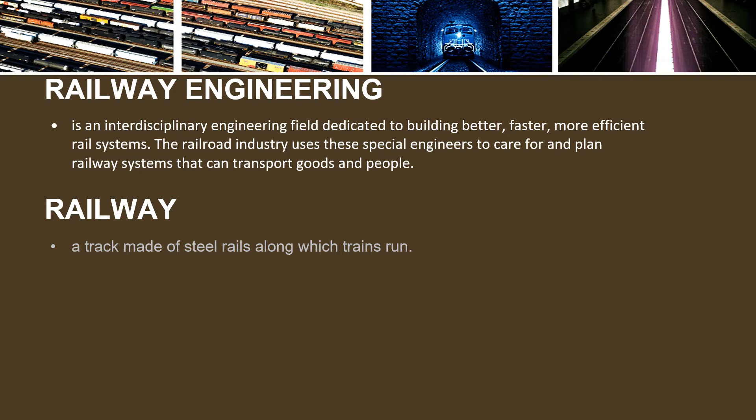Let's tackle the history. It was invented in Great Britain in the 18th century. Rail transport expanded considerably during the second half of the 19th century and the beginning of the 20th century, but there was a considerable decline in the second half of the 20th century due to the increase in car and lorry use. In the last 20 years, high-speed trains, saturated roads, and the development of urban rail transport have led to a new expansion of railways, though because of this many branch lines closed.

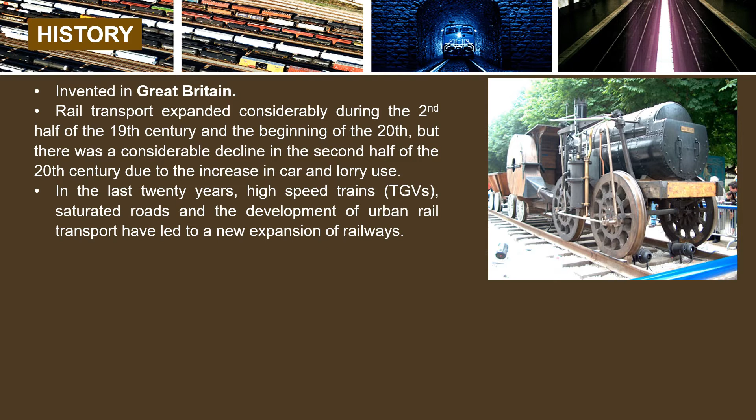This engine in the picture was designed by Marc Seguin. It was one that helped pull coal trains from the mines to waterways.

Before the 1800s, the road network was fairly complete, but travel was slow and uncomfortable. Wagons drawn by horses were still, along with water transport, the only means of travel. Denis Papin had discovered steam power in 1679, but there was a 100-year wait before the British combined steam traction and cast iron rails. It was also a British engineer, James Watt, who designed the first really useful steam engine in 1776. It took 100 years for steam traction and cast iron rails to be fully developed.

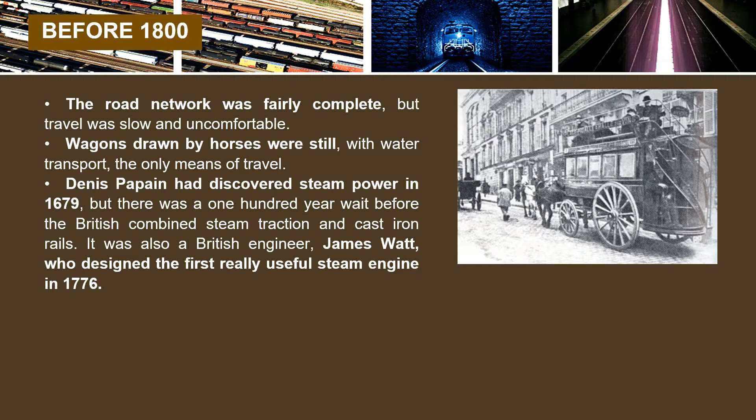From before 1800 to 1850 in England: in 1804, Richard Trevithick built and operated the first locomotive. In 1806, with the help of William Jessop, they developed the shape of the wheel, which marked the true start of railways. Between 1812 and 1823, locomotives were built successively by John Blenkinsop, Matthew Murray, William Hedley, Christopher Blackett, and George Stephenson.

As early as 1817, Stephenson built a locomotive that pulled a 30-ton train at 10 kilometers per hour. In 1823, George and Robert Stephenson founded the locomotive factory in Newcastle, where the first engines used in France were built.

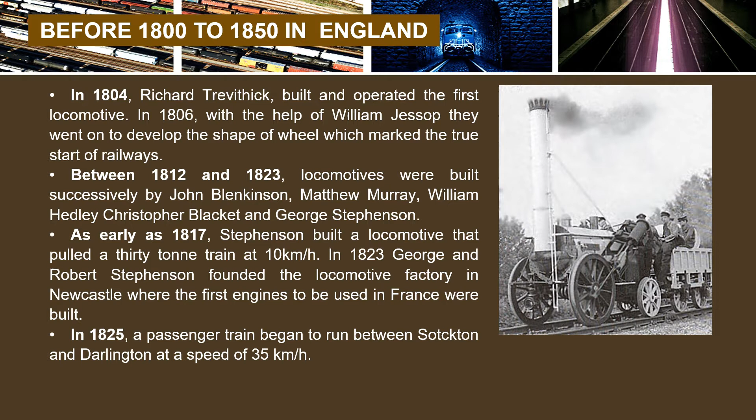In 1825, a passenger train began to run between Stockton and Darlington at a speed of 35 kilometers per hour. That year, the British introduced the first fixed signaling on railways and the first use of tickets. The one shown at the side is Stephenson's Rocket from 1829.

Before 1800 to 1850 in France: French engineer Marc Seguin, who invented the tubular boiler, persuaded the minister in 1826 to build the first modern railway line joining Lyon and Saint-Étienne over a distance of 56 kilometers. Seguin took charge of the works, commissioning and the different stages of operation. He used two locomotives purchased from Stephenson's factory, but found the English locomotives too heavy and too slow. In 1829, he modified his tubular boiler to produce 1,800 kilograms of steam power per hour instead of 300, increasing train speed from 10 to 40 kilometers per hour.

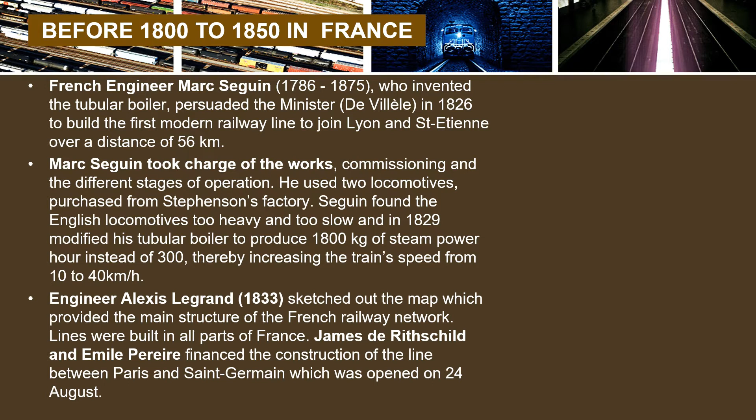Next, from 1850 to 1870, the golden age of rail. Works started on a large number of lines, and the six large companies that were to manage the national network on the basis of geographical zones were set up in 1859. At the same time, in urban areas, the development of public transport resulted in the appearance of the tram, a railway that runs at street level on flat or grooved rails. Paris was the first city to have a tram, on Quai d'Orsay in 1854. Horse-drawn vehicles were still used until 1880.

So next, 1870 to 1914. It is the rail triumphs over the road. Ernest Goüin, an important champion of progress, was convinced that machines should liberate mankind from the slavery of nature.

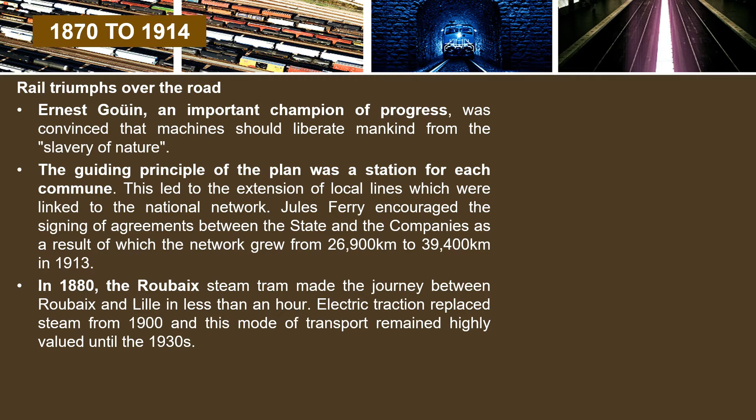In 1880, the Roubaix steam tram made the journey between Roubaix and Lille in less than an hour. Electric traction replaced steam from 1900s, and this mode of transport remained highly valued until 1930s.

In 1900s, after a 40-year gestation period and 12 years of debate in the Paris Council, Fulgence Bienvenüe built the first line of the Paris Metro between Maillot and Vincennes.

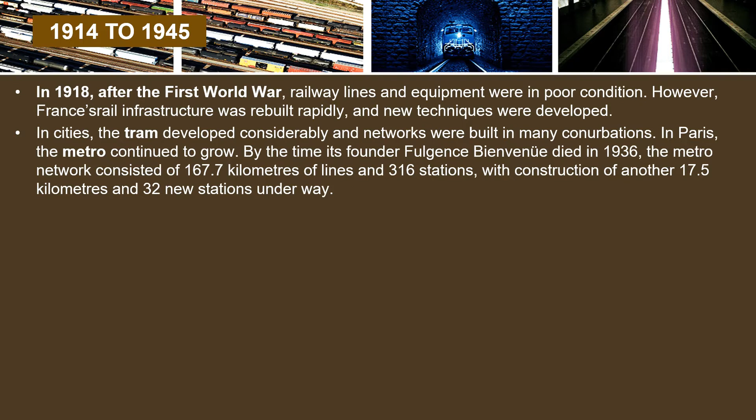By the time its founder Fulgence Bienvenüe died in 1936, the metro network consisted of 167.7 km of lines and 316 stations, with construction of another 17.5 kilometers and 32 new stations underway.

The economic crisis of 1930 struck during this period of optimism. The railway companies were no longer able to meet their obligations, and the government decided to nationalize them.

The French National Railway Company was created in 1938. The trams disappeared from every city apart from Marseille, Roubaix, and Saint-Étienne.

During the Second World War, railways played a vital role, both in terms of transport and resistance activities on the part of the workforce. The latter resulted in large-scale destruction, which means that reconstruction was once more required.

This provided the starting point of the period of modernization, which is still continuing today.

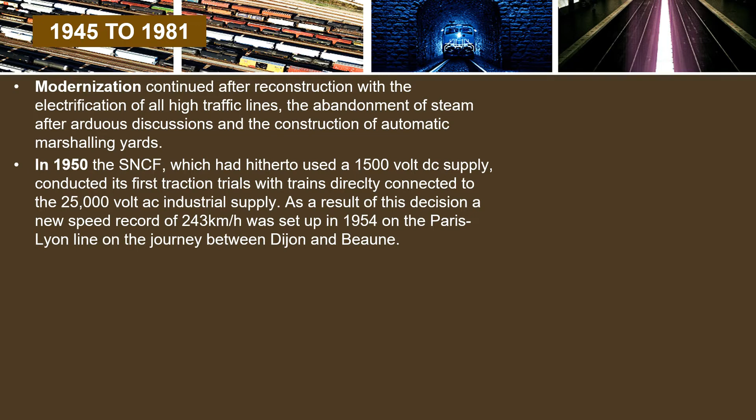On 29 March 1955, on the Bordeaux-Dax line between Lamothe and Morcenx, the BB 9004 locomotive set a new speed record of 331 km per hour. This record was a spectacular achievement for the time and remained unbroken until the advent of the TGV.

Between 1970 and 1985, the Paris Regional Express Network was created, extending several suburban rapid transit metro lines, and metros began also to be built in Lyon and Marseille first, then Lille and Toulouse.

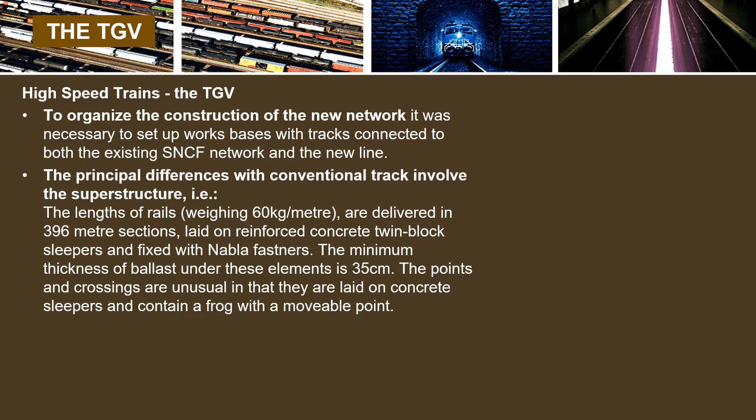The points and crossings are unusual in that they are laid on concrete sleepers and contain a frog with a movable point. 1981 saw the opening of the high-speed line between Lyon and Paris. The trains travel at 270 km per hour.

The TGV had arrived. In 1990, a new world record was set on the recently constructed line between Paris and Tours. It is 513.3 km per hour.

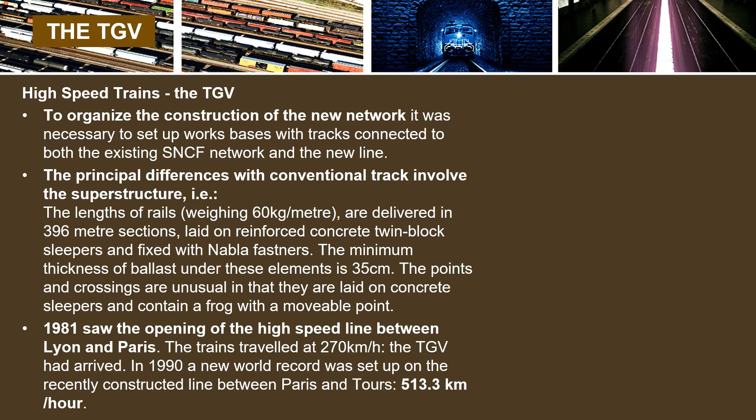So this picture was the TGV in 1993. So next, the last century of the history of railway engineering, the 21st century.

The creation of the cross-channel link with the opening of the Channel Tunnel on 23 June 1991 confirmed the technical excellence of French companies which are able to adapt to all environments with complete success. New techniques are also being applied to urban networks, both on rapid links and tram networks. The latter are making a comeback in city centers with the dual aim of integrating harmoniously within the environment and improving passenger comfort and access.

Between now and 2010, more than 1,000 kilometers of electrified lines will be added to the existing network. This electrification is scheduled for 2000 to 2006 and will involve the opening of new lines including the Eastern Europe TGV, and the revitalization of freight routes, which will mean more lorries will be carried on trains.

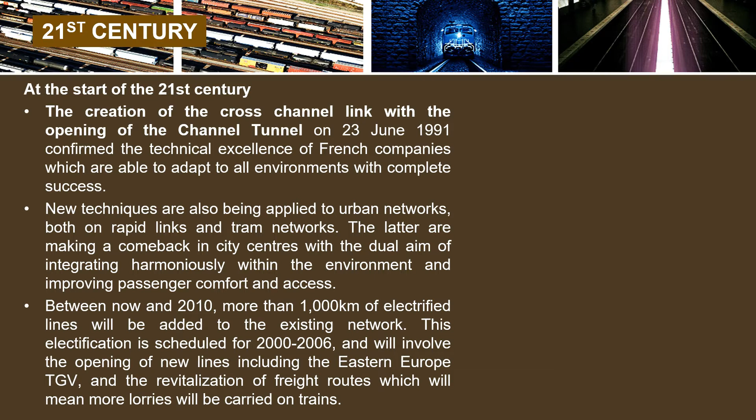Good day everyone, I am Jonathan Odanga and the topic that I will be reporting is the subfields of railway engineering. These are the specialized fields that compose railway engineering.

First is mechanical engineering. It is an engineering branch that combines engineering physics and mathematics principles with material science to design, analyze, manufacture, and maintain mechanical systems. It is the branch of engineering that involves the design, production, and operation of machinery.

One of the fields where a mechanical engineer can work is railway engineering. They are assigned to the manufacturing and maintenance of factory, goods, and passenger carriers, before discussing the role of a mechanical engineer.

The role of a mechanical engineer in railways: mechanical engineers in railways look after train operations like crew management, motive power ability, traffic restoration, repair, and rolling stock management and manufacturing, etc.

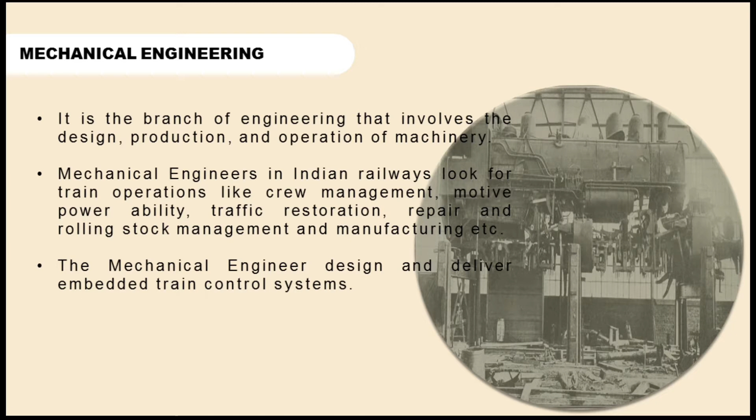Almost every aspect of the railway relies on mechanical engineering, from track signals and trains to ticket barriers and tunnels. And even in elaborating control systems is a responsibility of the mechanical engineer, as the mechanical engineer designs and delivers embedded train control systems.

Command, control, and railway signaling. Railway signaling is a system used to direct railway traffic and keep trains clear of each other at all times. Trains move on fixed rails, making them uniquely susceptible to collision. Basically, railway signaling is a mechanism where the station master or controller conveys information or data to the driver or loco pilot on when to stop, go with caution, or proceed.

There are two types of signaling system in railway: time interval method and space interval method. In time interval method, trains are spaced over a length of track in such a way that if the first train stops, the following train driver should be able to stop the train in sufficient distance without colliding with the first one.

In space interval method, this method of controlling movement divides the length of track into sections called blocks. The entry of a train into the block is controlled in such a way that only when it is free can a train be allowed to enter it. This means that between two consecutive trains there is a definite space interval.

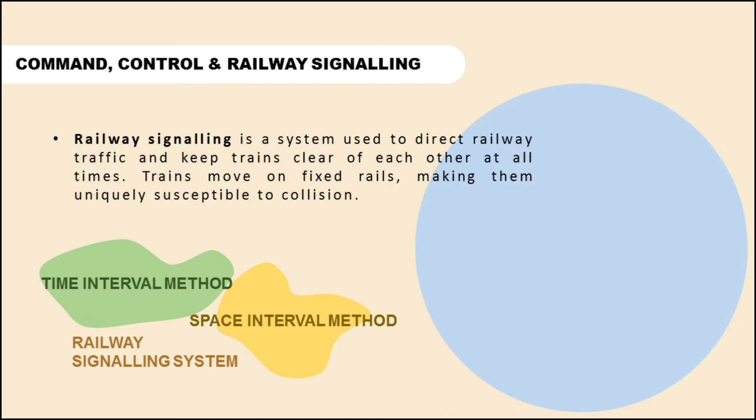Signals are further divided into two types: visual and audible. Under audible, we have detonators, voice, and whistle. Under visual, we have movable flag, fixed signal, and flare signal. In fixed signal, we have two-aspect and multi-aspect.

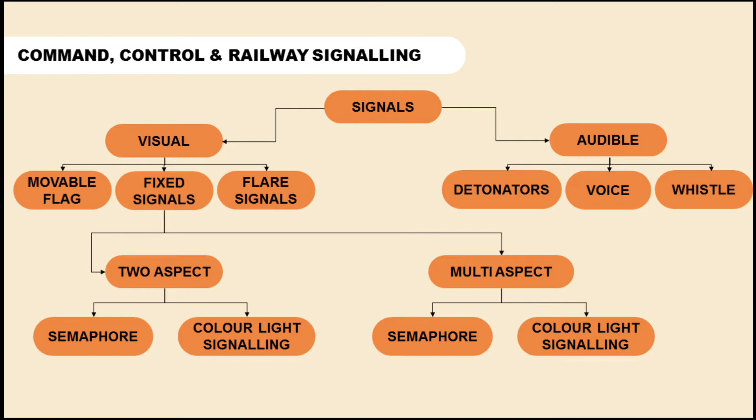So for two-aspect, we have semaphore and color light signaling, same with multi-aspect: semaphore and color light signaling. Semaphore signaling uses signals which are rectangular or fish-tailed arms fixed to a vertical post. The arm is rotated at different angles to convey information to the loco pilot. These are stop dead aspect and proceed aspect.

Color light signals are used to convey information to the loco pilot. If it is color red aspect, it means stop dead. If it is yellow, it means caution, meaning proceed and be prepared to stop at the next signal. If it is green, it means proceed.

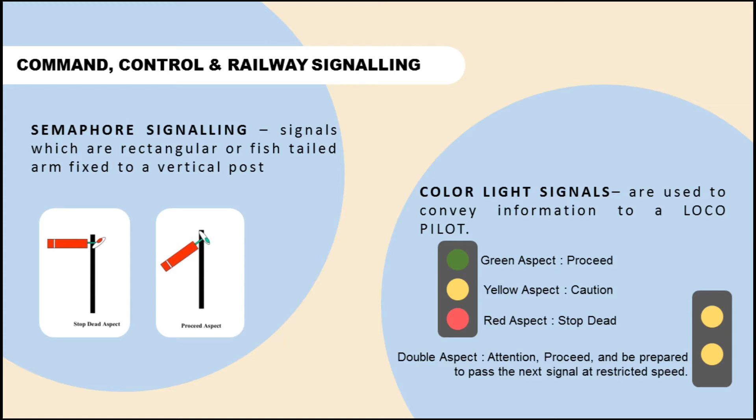And we also have the double aspect, which means attention, proceed, and be prepared to pass the next stop signal at restricted speed.

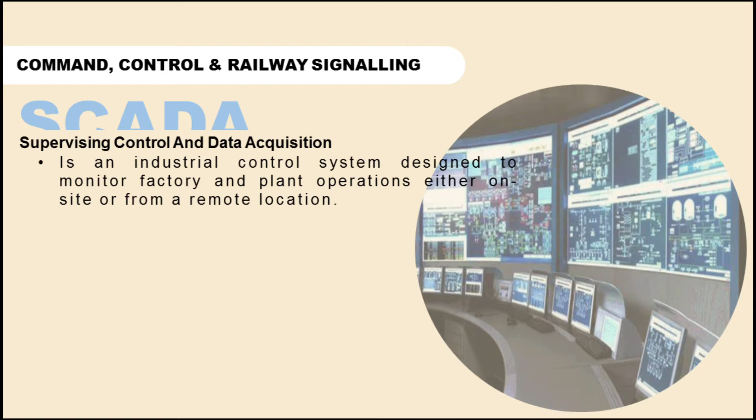SCADA, or Supervising, Control, and Data Acquisition, is an industrial control system designed to monitor factory and plant operations either on-site or from a remote location. It is made up of both hardware devices and SCADA software that allow the user to control and monitor operations. Basically, SCADA in railway is a medium to convey data between a host and the equipment.

Next is electrical engineering, the field of study of generation, transmission, distribution, and the use of electrical energy. Electrical engineering in railways made its beginning with the responsibility of illumination and ventilation of railway stations, offices, and residential complexes, and water supply.

Railway electrification system supplies electric power to railway trains and trams without an onboard prime mover or local fuel supply. Electric railways use either electric locomotives, electric multiple units, or both.

There are three main types of electric traction that exist in railway. The first is the DC electrification system. The choice of selecting this system encompasses many advantages such as space and weight considerations, rapid acceleration and braking of DC electric motors, less cost compared to AC systems, less energy consumption, and so on.

The second one is the AC electrification system. This system has become very popular nowadays and is more often used in most traction systems due to several advantages such as availability and generation of AC that can be easily stepped up or stepped down, easy controlling of AC motors, less number of substations required, and the presence of light overhead catenaries that transfer low currents at high voltages, and so on.

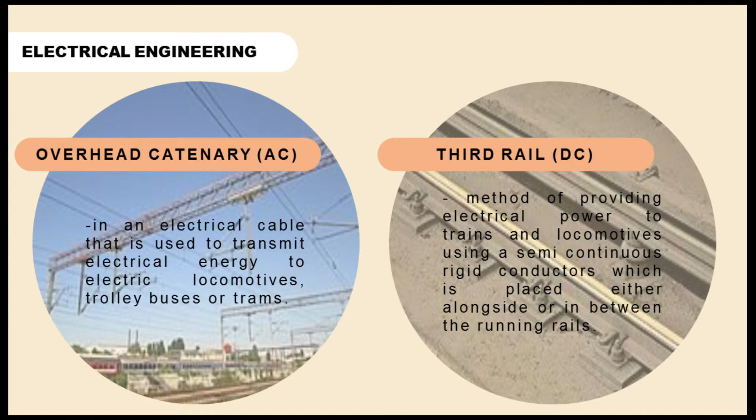Another subfield of railway engineering is civil engineering. A railway civil engineer specializes in the design, construction, and operation of all types of railway systems, which may include mainline, metro, light rail, or high-speed rail.

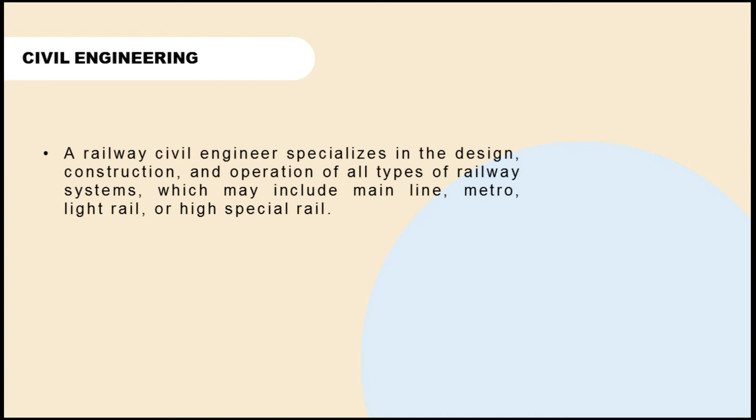What is the role of civil engineers in the construction of railway tracks? The following are the stages of construction of railway tracks. First is planning: the geometric design of railway, gradients, curves, tunnels, bridges, etc. It is the responsibility of the civil engineer to ensure smooth and safe travel without excessively sharp turns or excessively steep grades, and also the signaling and switching of trains are planned by the civil engineer at this stage.

Next stage is the design. In the design stage, specialized civil engineers such as structural and geotechnical engineers are needed to design railway tracks, bridges, tunnels, soil improvement, and thickness of ballast bed, and whatever else is needed.

Last stage is the construction. Here, construction begins: planning, scheduling, management of the project such as men, workers, machinery, and funds, ensuring safety on site, etc., in order to complete the project safely within budget and on schedule.

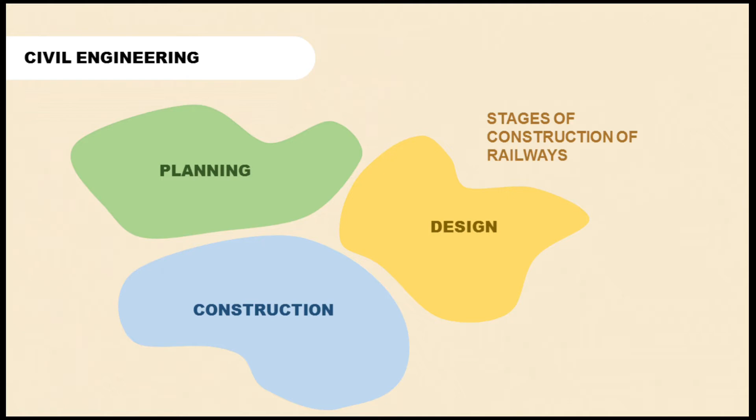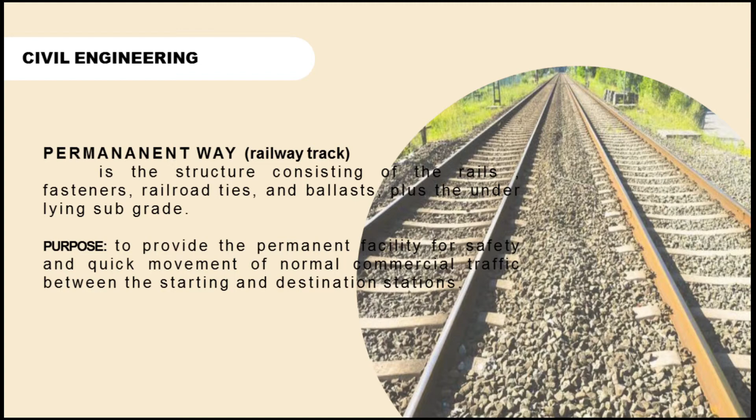Permanent way engineering: railway track, also known as permanent way, is the structure consisting of the rails, fasteners, railroad ties, and ballast, plus the underlying subgrade. The purpose of the permanent way is to provide the permanent facility for safety and quick movement of normal commercial traffic between the starting and destination stations.

Next is light rail system, more commonly known as LRT, light rail transit, a form of passenger urban rail transit characterized by a combination of tram and metro features. But why is there LRT?

Light rail is used to provide modern, high-order, rapid transit in world-class cities around the globe. Light rail can carry more passengers than streetcars or buses, and light rail vehicles can be joined together to meet growing demand. Another reason is they can operate on the surface and dedicated lanes, in tunnels, or on elevated guideways fully separated from traffic, providing convenient comfort, speed, and reliability. Light rail is also electrically powered with no emissions, so not only will it help move people through the city, it is also environmentally friendly.

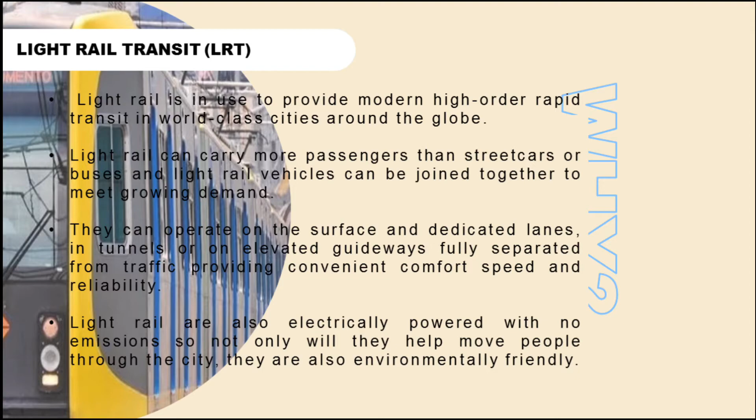Next is railway system integration, which ensures that everything is in order, with nothing broken or problematic. It ensures the rail systems, trains, and infrastructure combined with operations and maintenance inputs deliver a resilient operational railway engineering meeting customer requirements. Next is train control systems, the hardware and software equipment that monitor train locations and movements in order to ensure safety.

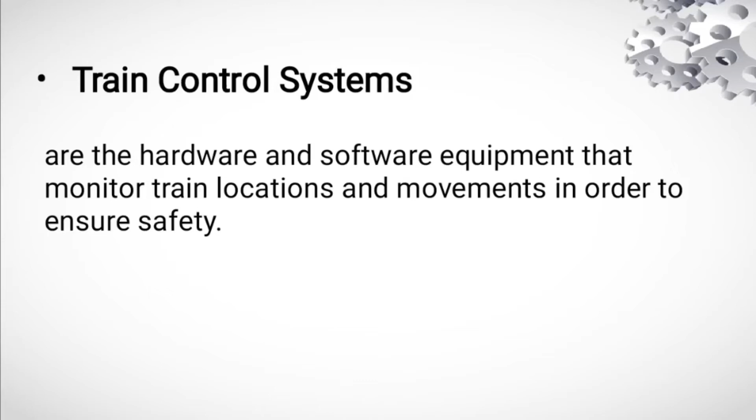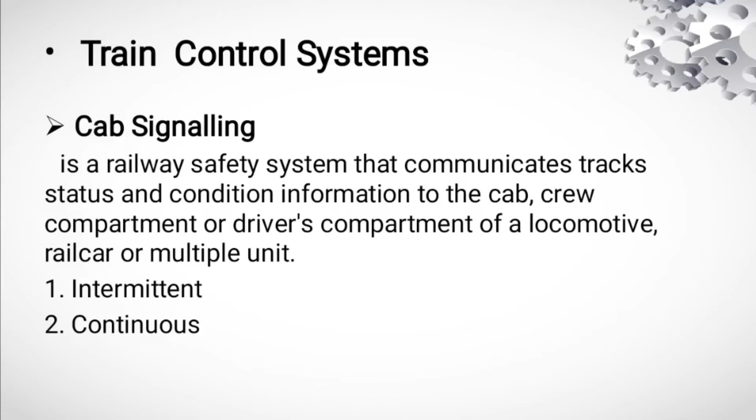Cab signaling is a railway safety system that communicates track status and condition information to the cab, crew compartment, or driver's compartment of a locomotive, rail car, or multiple unit. There are two types of cab signaling: intermittent and continuous. For a smoother flow of railway operations, we need signaling such as cab signaling so that the cab crew or drivers can better understand each other.

Next is rail vehicle engineering. You will be able to classify rail vehicles and know their fundamental differences from road vehicles. Here we study, learn, and classify the differences between rail and road vehicles.

Kung ano ba yung mga gamit nila, yung mga equipments na kailangan nila, lahat ng mga pinagkaiba nila.

Next is rolling resistance, or sometimes called rolling friction or rolling drag. It is the force resisting the motion when a body, or pwede rin siyang ball, tire, or wheel, rolls on a surface. It is mainly caused by non-elastic effects. That is, not all the energy needed for the deformation or movement of the wheel, roadbed, etc. is recovered when the pressure is removed.

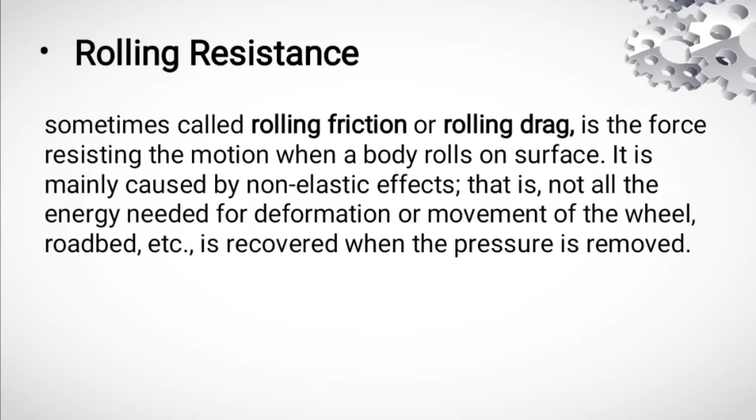So nakapaloob sa rolling resistance ay ang curve resistance. It is a part of train resistance, namely the additional rolling resistance a train must overcome when traveling on a curved section of track. So from the word itself, curve, ito yung mga resistance na kailangan sa mga pakurbang daan or minsan sa mga sinasabi nating banking.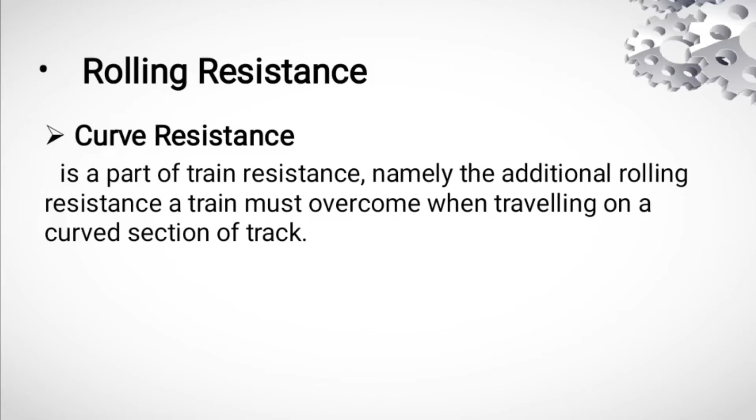Next is wheel-rail interface. It is the area of contact between wheels and rails of railways. The interaction between wheel and rail is a specialized subject covering the design and management of the high stresses in the small contact area between a steel wheel and a steel rail. So ito nga yung sa mga gulong at ito rin yung major source kung bakit maingay yung mga train which disturbs both people in the surrounding and passengers.

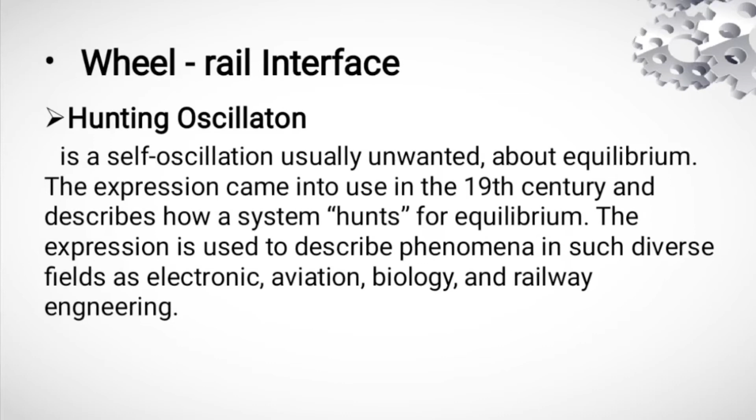Nakapaloob sa wheel rail interface ay ang hunting oscillation. It is a self-oscillation usually unwanted about equilibrium. The expression came into use in the 19th century and describes how a system hunts for equilibrium. The expression is used to describe phenomena in such diverse fields as electronic, aviation, biology, and railway engineering.

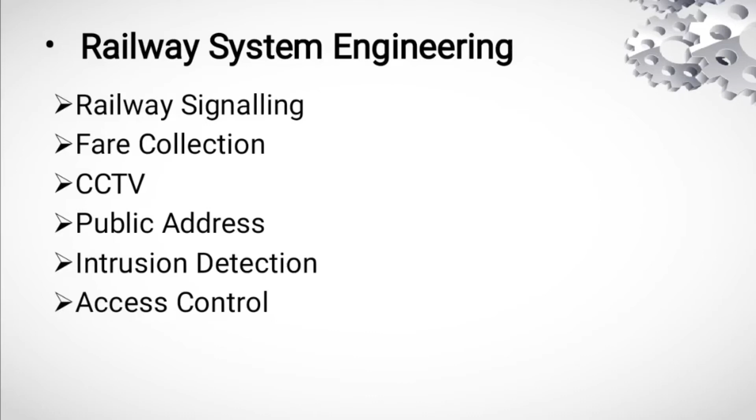Six types of railway system engineering are railway signaling, fare collection, CCTV, public address, intrusion detection, and access control.

First is railway signaling. It's a system used to direct railway traffic and keep trains clear of each other at all times. Trains move on fixed rails, making them uniquely susceptible to collision. This susceptibility is exacerbated by the enormous weight and momentum of a train, which makes it difficult to quickly stop when encountering an obstacle. So itong railway signaling nga is para mas maging maayos yung daloy ng mga trains para maiwasan ang pagkakaroon ng collision.

Exacerbated means making a problem worse. So what makes the problem on trains worse is yung mga mabibigat na dala ng train.

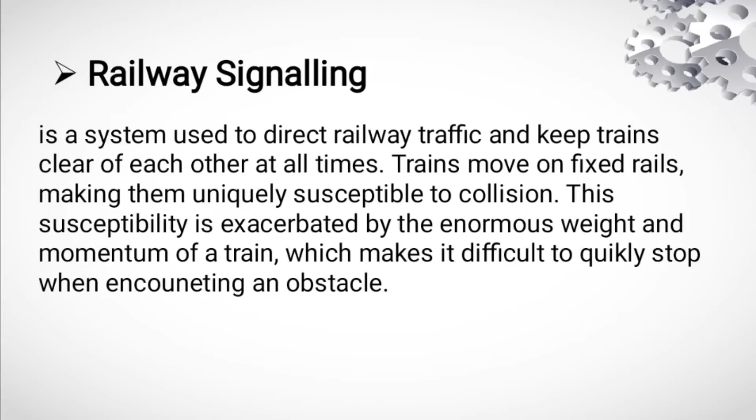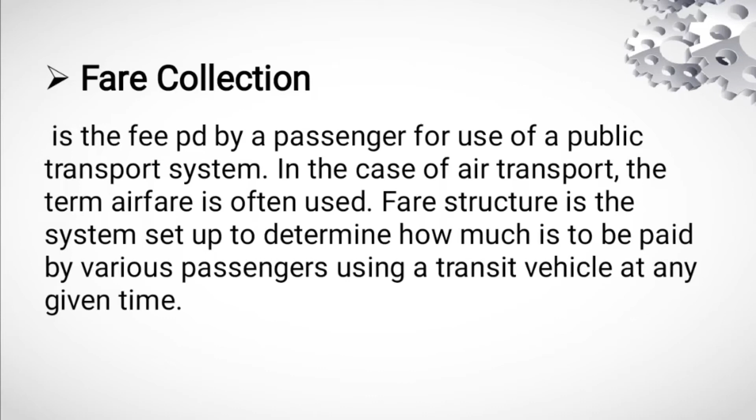Next is fare collection. It is the fee paid by a passenger for use of a public transport system. In the case of air transport, the term airfare is often used. Fare structures are the system set up to determine how much is to be paid by various passengers using a transit vehicle at any given time. Aware naman tayong lahat na kapag sumasakay tayo sa mga sasakyan, kailangan nating magbayad. At yung bayad natin is nakadepende sa sasakyan natin at sa kung saan tayo pupunta.

Next is CCTV. Closed circuit television or CCTV, also known as video surveillance, is the use of video cameras to transmit a signal to a specific place on a limited set of monitors. So alam naman nating lahat kung ano at para saan ang CCTV. Nakikita natin siya sa mga malls, sa mga bahay, sa mga tindahan, at sa mga daan para mas maging safe yung place na yun.

Next is public address. Public address system or PA system is an electronic system comprising microphones, amplifiers, loudspeakers, and related equipment. So ito yung mga equipment na nagpapa-aware sa mga tao or nagsisignal sa mga tao kapag may announcement or kapag may mga parating na sasakyan, ganun.

Next is intrusion detection, also called intrusion detection system or IDS. It is a device or software application that monitors a network or systems for malicious activity or policy violations. An intrusion activity or violation is typically reported either to an administrator or collected centrally using a Security Information and Event Management or SIEM system. So ito nga isang device or pwede yung software application na nag-monitor kapag may mga malicious activity na or violations at nare-report ito sa administrator or pwede din sa SIEM.

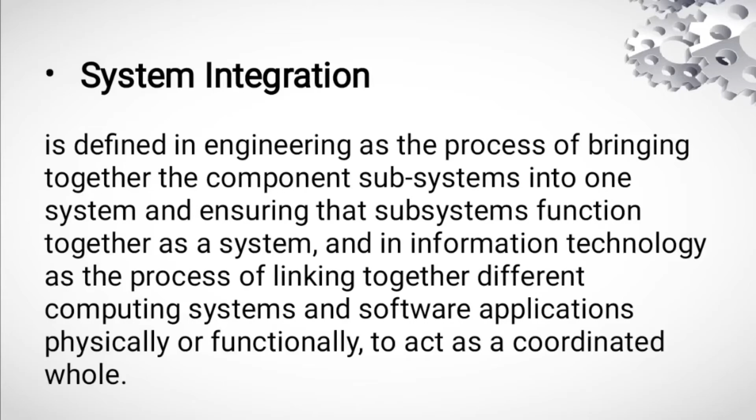Let me give a brief description of railway engineering. It builds better, faster, and more efficient rail systems. In short, it is all about rails. Railway engineering is considered an interdisciplinary engineering field, meaning it requires specific knowledge and skills related to railways. The expertise of an engineer in this field is required to make railway engineering work, because how can one build better and faster rail systems if the person in charge does not have the right knowledge to operate it?

Railways are incredibly complex and expensive systems designed to provide efficient passage of trains to transport people and equipment. At first glance, it looks like it needs a lot of attention and skill. So we can conclude that the railway system is indeed complicated, which will cost a lot of effort and money.

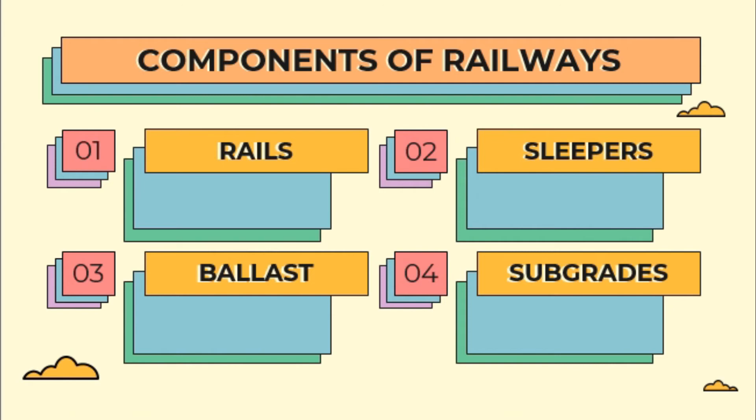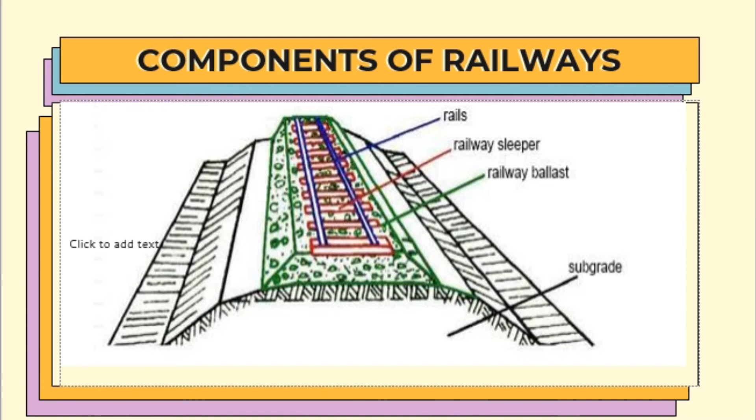First, let us talk about rails. A rail is a horizontally extending steel bar between supports that serves as a track for trains, automobiles, and other vehicles. In the railway system, rails are considered the first main element of a railway, because they bear the wheel load of the trains, providing them a smooth way and transferring the load safely to the sleepers. There are 3 types of rails: double-headed rails, bull-headed rails, and flat-footed rails.

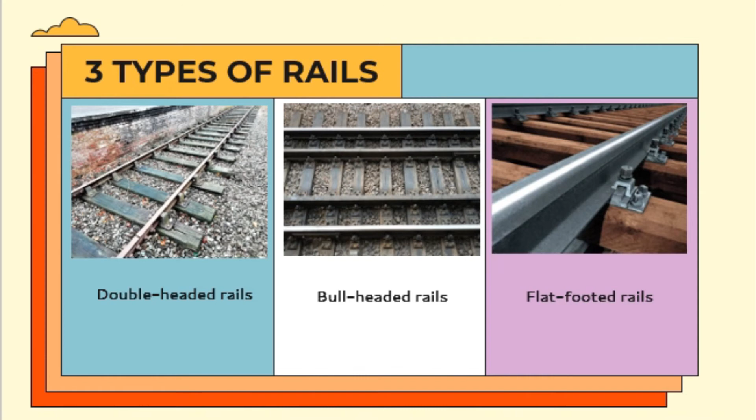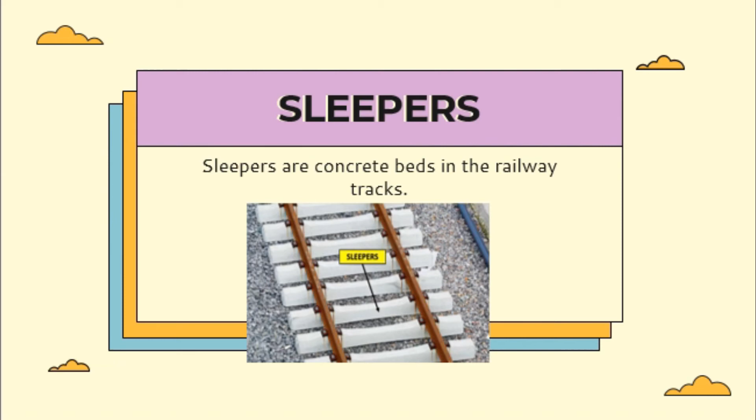The next component is sleepers. Sleepers are concrete beds in the railway tracks, considered the second main element of a railway. Unlike rails, sleepers are fixed vertically to each other. Their main purpose is to hold the rails and strengthen their position so they can resist strong weight capacity. The loads they receive from the rails are distributed to the subgrades and the ballast. Commonly, sleepers consist of concrete, timber, steel, cast iron, RCC, and pre-stressed concrete.

Ballast: track ballast is formed from the track bed upon which railroad ties or sleepers are laid. It is packed between, below, and around the ties. It is used to bear the load from the railroad ties, facilitate drainage of water, and keep down vegetation that might interfere with the track structure. The ballast is placed below or around the sleepers so it can bear the load from the railroad, and it also prevents vegetation from growing around the tracks.

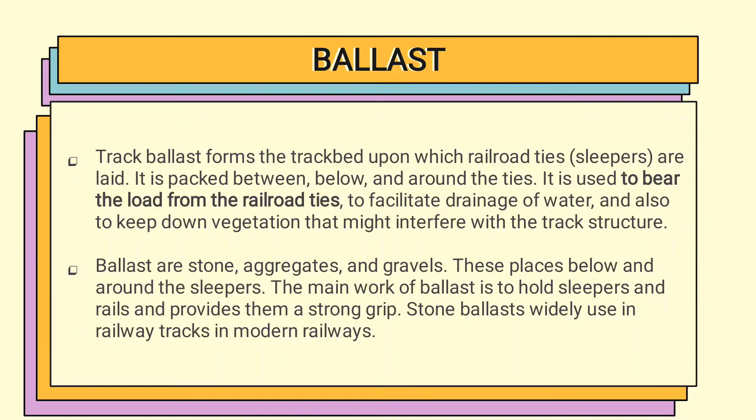Uses of aggregates in railway ballast: a fully loaded train weighs in thousands of tons. To avoid damage to rails, ground, and other nearby structures, a very tough aggregate is needed not only to support this high weight but also to distribute and transfer it properly to the ground. So a different aggregate is used here, one that is very tough to avoid damage from the rails and to bear the load of a 1,000-ton train.

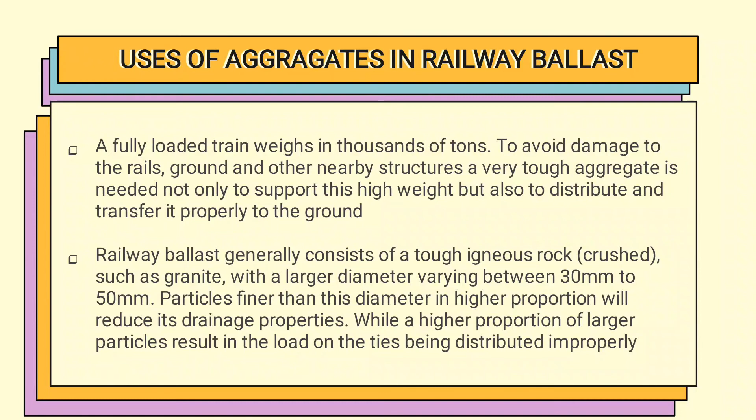Railway ballast generally consists of tough igneous rock, crushed, such as granite, with a large diameter varying between 30mm to 50mm. Particles finer than this diameter in higher proportion will result in poor drainage properties, while a higher proportion of larger particles results in the load on the ties being distributed improperly. So the aggregate used here should be between 30mm to 50mm only, so the load can be properly distributed on the track.

Angular stones are used as ballast due to their physical properties that allow them to interlock with each other. Therefore, they are used to resist any movement of the rails and ties. Other uses include fills, backfills, and drainage and filtration applications.

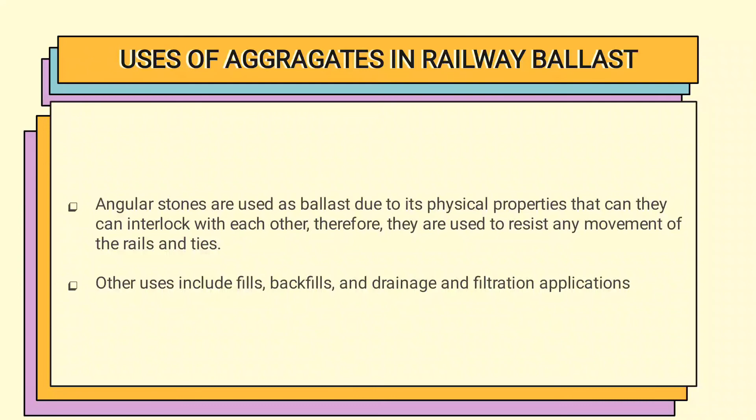Formation of subgrade. There are natural soils on the bottom of a track. These are the foundation of tracks. It holds rails, sleepers, ballast, and the entire track together. It supports the railway track from the bottom layer. The role of the subgrade in railways is similar to that of a building foundation.

Kung yung building foundation ay merong soil kung saan tinatayo ang foundation, yung sa track naman meron siyang natural subgrade. Doon mismo nilalagay yung track.

The effects of subsoil that cannot carry much load are devastating. Back in the 19th century, it was recognized that the proper drainage of water and the adequate dimensioning of the load-bearing capacity were key factors in the success of the railway system. Kailangan ang pagtatayuan mong subsoil o subgrade ay kayang i-bear yung load at maganda ang drainage niya para matayo ng maayos ang railroad doon.

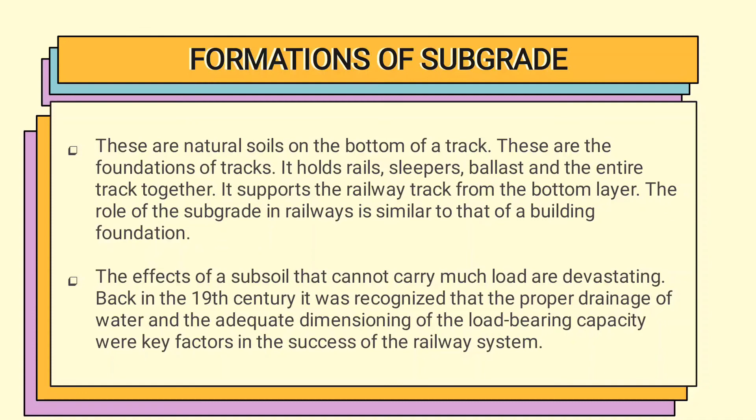Problems in the subgrade are often only discovered at a late stage. If muddy places appear on the surface, the effects on the complete system are normally so far advanced that it is necessary to replace all components, even though formation rehabilitation is significantly more expensive than conventional track renewal. It shows its positive effect when the complete life cycle cost of the track is considered.

Poor subgrade increases maintenance and reduces the useful life of the railway track. So in choosing the subgrade, kailangan talagang pag-aralan at pagplanuhang mabuti kung saan ito itatayo, kasi poor subgrade increases the maintenance. Kaya sabi dito, even though formation rehabilitation is significantly more expensive than conventional track renewal, it shows a positive effect.

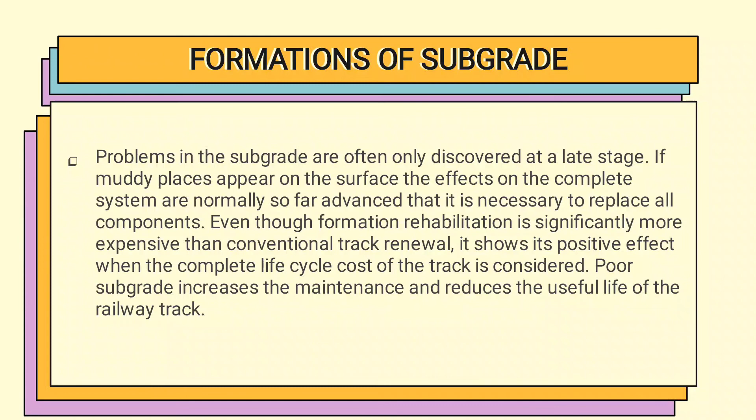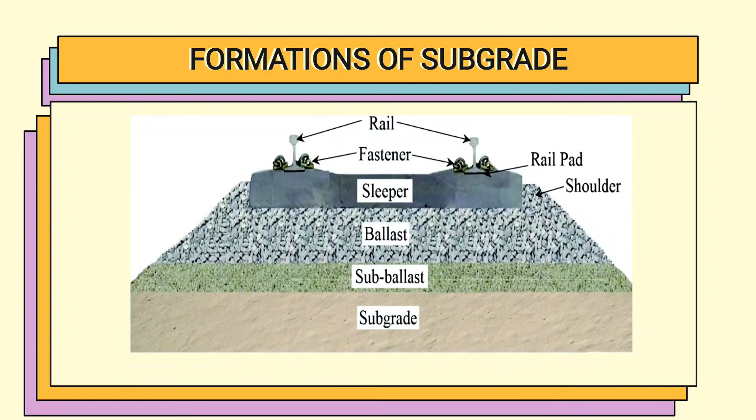Railway stations. A railway station is that place on a railway line where traffic is booked and dealt with, and where trains are given the authority to proceed forward. Sometimes only one of these functions is carried out at a station, and accordingly it is classified as a flag station or a block station.

In the case of a flag station, there are arrangements for dealing with traffic, but none for controlling the movement of the trains. In the case of a block station, a train cannot proceed further without obtaining permission from the next station, and the traffic may or may not be dealt with.

Purpose of a railway station. A railway station is provided for one or more of the following purposes.

First, to entrain or detrain passengers. Next is to load or unload goods or parcels. Third, to control the movement of the trains. Fourth, to enable trains to cross each other in the case of a single line section. Fifth, to enable faster trains to overtake slower ones. Sixth, to enable locomotives to refuel, whether it be diesel, water, or coal. Seventh, to attach or detach coaches or wagons to trains.

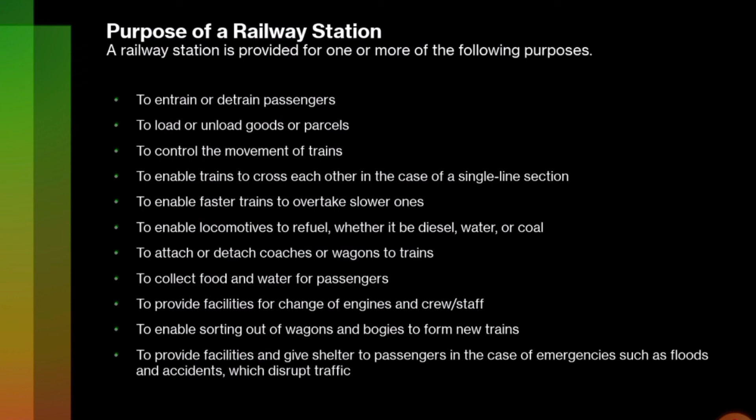Eighth, to collect food and water for passengers. Ninth, to provide facilities for change of engines and crew or staff. The tenth one is to enable sorting out of wagons and bogies to form new trains. And lastly, to provide facilities and give shelter to passengers in the case of emergencies such as floods and accidents which disrupt traffic.

Selection of site for a railway station. The following factors are considered when selecting a site for a railway station. First, adequate land. There should be adequate land available for the station building, not only for the proposed line but also for any future expansion. The proposed area should also be without any religious buildings.

Second factor, level area with good drainage. The proposed site should preferably be on a fairly level ground with good drainage arrangements. It should be possible to provide the maximum permissible gradient in the yard. In India, the maximum permissible gradient adopted is 1 in 400, but a gradient of 1 in 1000 is desirable.

The third factor, alignment. The station site should preferably have a straight alignment so that the various signals are clearly visible. The proximity of the station site to a curve presents a number of operational problems.

Fourth factor, easy accessibility. The station site should be easily accessible. The site should be near villages and towns. Nearby villages should be connected to the station by means of approach roads for the convenience of passengers.

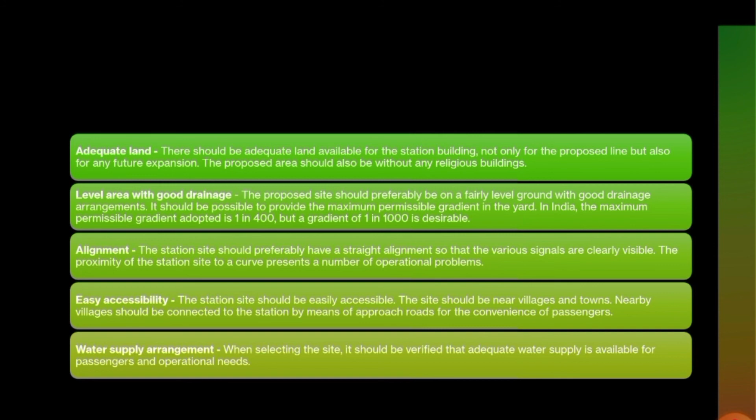Classifications of railway stations. Railway stations can be broadly sorted into various classes on the basis of two main considerations. First is operational considerations. As per the general and subsidiary rules of Indian Railways, stations are classified as block stations and non-block stations. Block stations are further classified as A-class, B-class, and C-class stations. Non-block stations are classified as D-class or flag stations.

Second, functional considerations. Stations are classified based on the functions they are required to perform. Under this category, stations are classified as halt stations, flag stations, crossing stations or wayside stations, junction stations, and terminal stations.

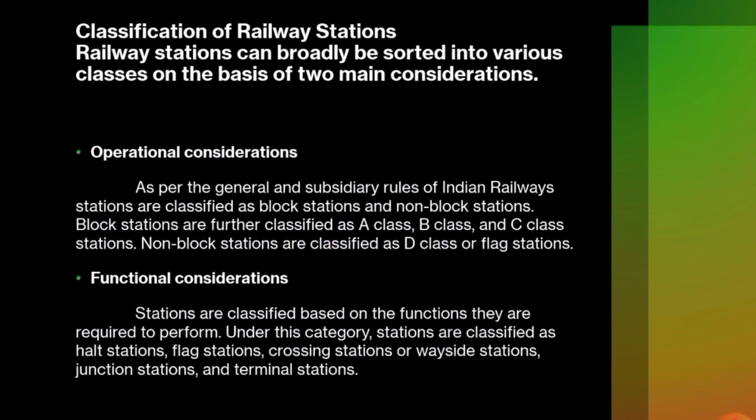Block stations. A block station is a station at which the driver has to obtain an authority to proceed in order to enter the next block section. In a railway system that is inclusive of block stations, the entire railway line is divided into convenient block sections of 5 to 10 km, and a block station is provided at the end of each block. This system ensures that a suitable space interval is provided between running trains so that there are no collisions and accidents. There are three types of block stations.

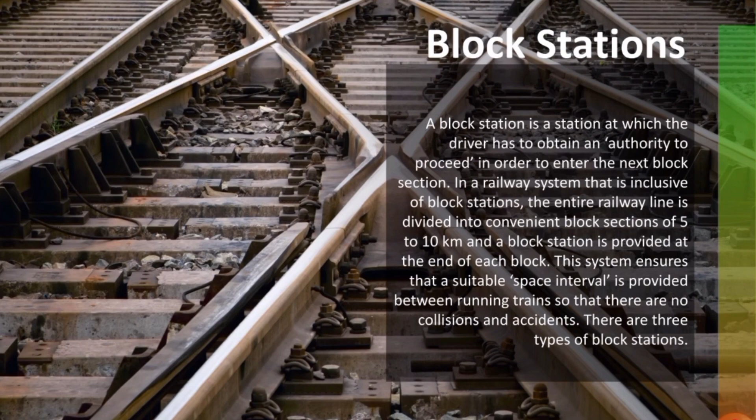The first, block stations, A-class stations. A-class stations are normally provided on double line sections. At such stations, a line clear signal cannot be granted at the rear of a station unless the line on which a train is to be received is clear and the facing points set and locked. No shunting can be done after line clear has been granted. A-class stations are suitable for sections where traffic passes rapidly. It is essential for the driver of the train to have an advanced knowledge of the layout of the block station.

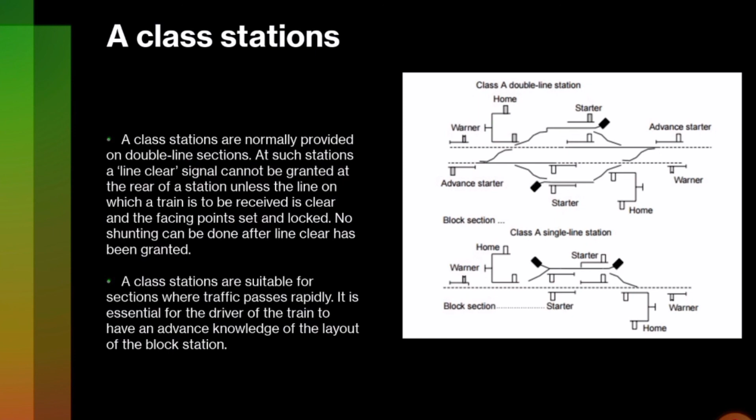B-class station. This is the most common type of station and is provided on single line as well as double line sections. At a B-class station, the line has to be clear to an adequate distance beyond the outer signal before permission to approach can be given to a train.

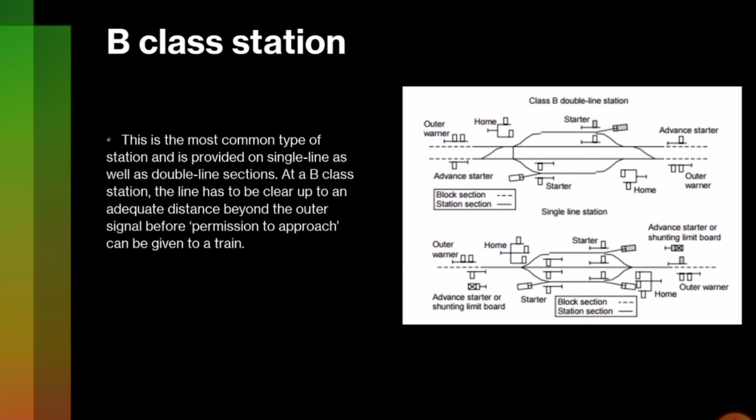C-Class Station. The C-Class Station is only a block hut where no booking of passengers is done. It is basically provided to split a long block section so that the interval between successive trains is reduced. No train normally stops at these stations.

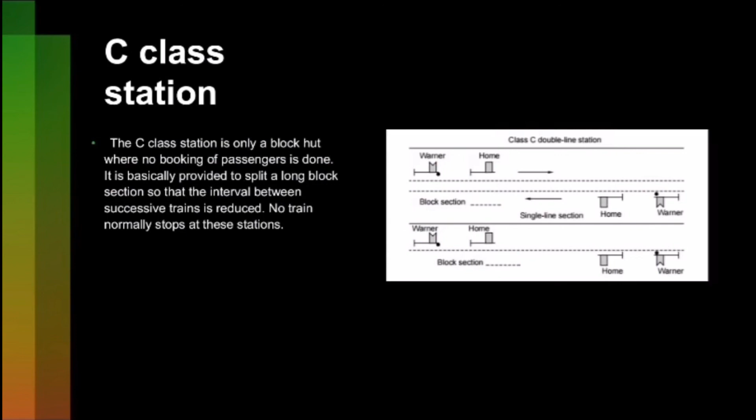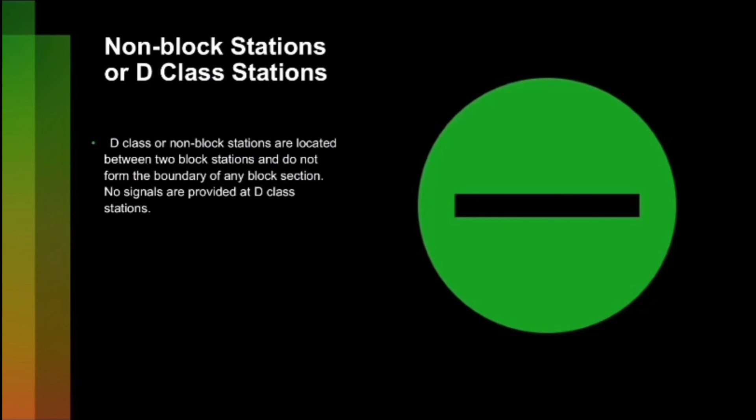Non-block stations or D-Class stations. D-Class or non-block stations are located between two block stations and do not form the boundary of any block section. No signals are provided at D-Class stations.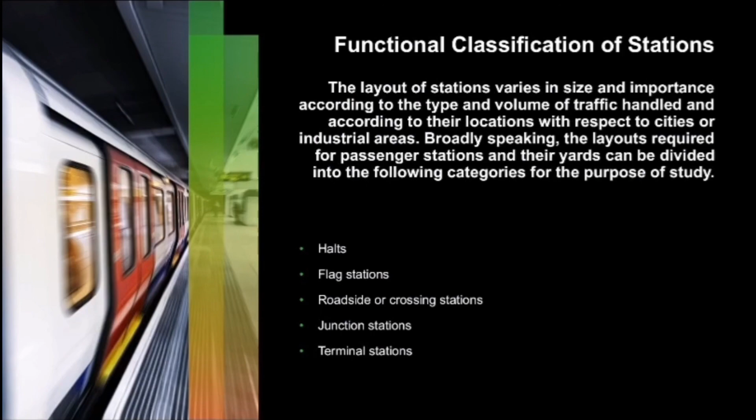Functional classification of stations. The layout of stations varies in size and importance according to the type and volume of traffic handled and according to their location with respect to cities or industrial areas. Broadly speaking, the layouts required for passenger stations and their yards can be divided into the following categories for the purpose of study. Halt. A halt is the simplest station where trains can stop on a railway line.

A halt usually has only a rail-level platform with a name board at either end. Sometimes a small waiting shed is also provided, which also serves as a booking office. There is no yard, station building, or staff provided for such type of stations. Some selected trains are allotted a stoppage of a minute or two at such stations to enable passengers to entrain or detrain. The booking of passengers is done by traveling ticket examiners or booking clerks.

A notable example of the halt is the Gurhmukteshwar Bridge halt, which is situated on the bank of river Ganga.

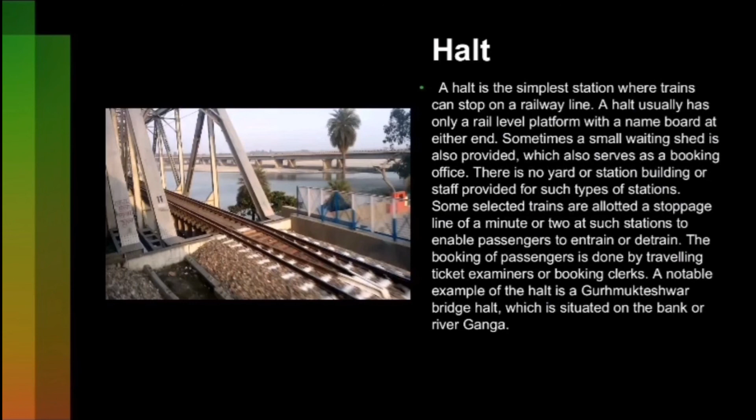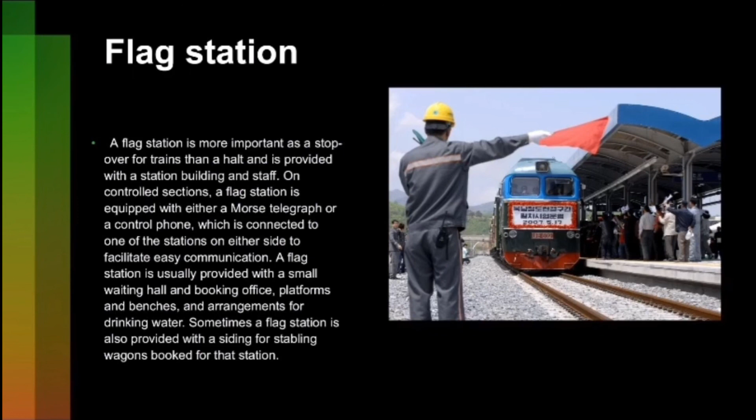Flag station. A flag station is more important as a stopover for trains than a halt and is provided with a station building and staff. On controlled sections, a flag station is equipped with either a Morse telegraph or control phone, which is connected to one of the stations on either side to facilitate easy communication. A flag station is usually provided with a small waiting hall and booking office, platforms and benches, and arrangements for drinking water. Sometimes a flag station is also provided with a siding for stabling wagons booked for that station.

Wayside or crossing station. After a flag station comes the wayside or crossing station. While a flag station has arrangements for dealing with traffic but none for controlling the movement of trains, a crossing station has arrangements for controlling the movement of trains on block sections. The idea of a crossing station was initially conceived for single-line sections to facilitate the crossing of trains going in opposite directions so that there may be a more rapid movement of trains.

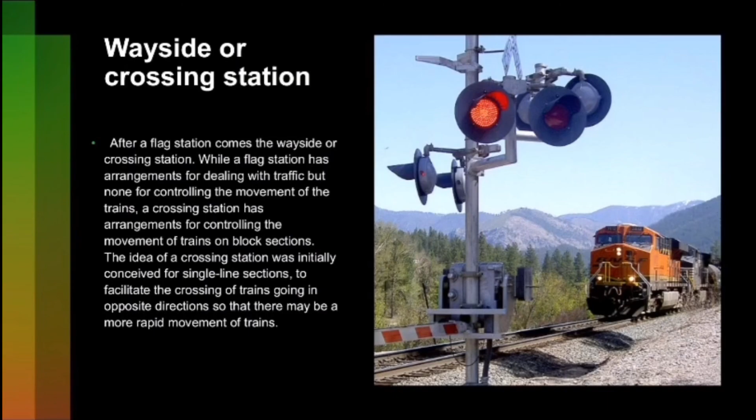Junction stations. A junction station is the meeting point of three or more lines emerging from different directions. Normally, at junctions, trains arrive on branch lines and return to the same station from where they started, or proceed to other stations from where they again return to their originating stations.

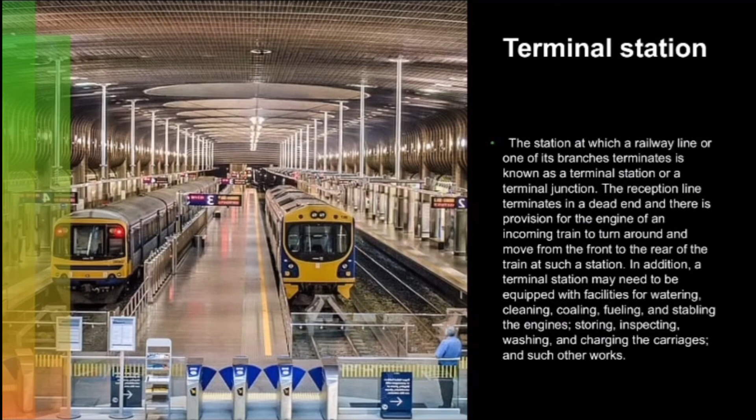Terminal station. The station at which a railway line or one of its branches terminates is known as a terminal station or terminal junction. The reception line terminates in a dead end and there is provision for the engine of an incoming train to turn around and move from the front to the rear of the train at such a station. In addition, a terminal station may need to be equipped with facilities for watering, cleaning, coaling, fueling, and stabling the engines, storing, inspecting, washing, and charging the carriages, and such other works.